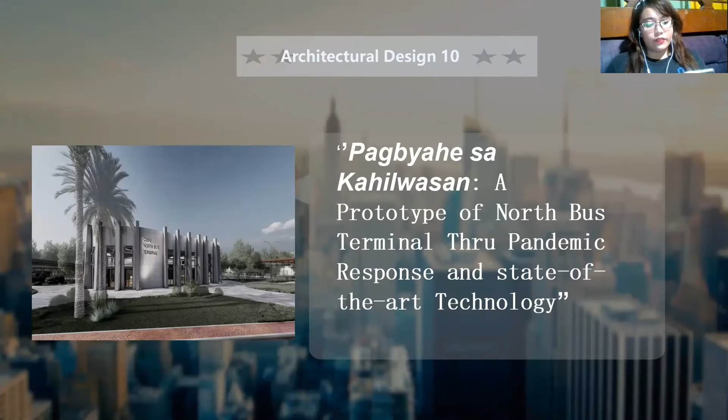Today, we are going to present our thesis titled Pagbyahe sa Kahilwasan, a prototype of North Bus Terminal through pandemic response and state-of-the-art technologies. For this presentation, we will be having 4 parts summarizing the concept and the working drawings: the introduction, followed by the design background, concept, and solutions.

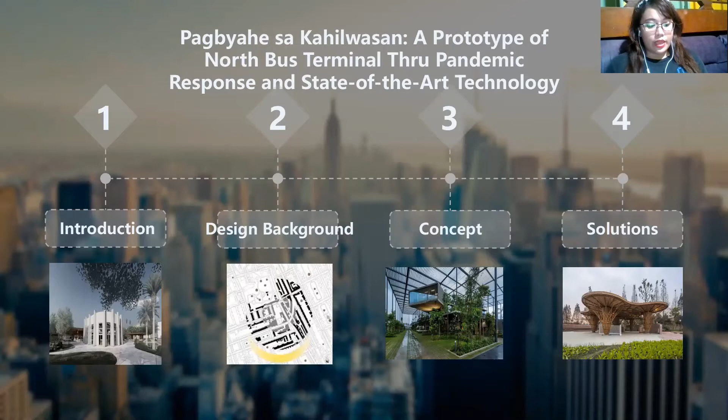So now we start with the introduction. This serves as the visual and guide on how we are able to incorporate ideas and solutions to make traveling and accessibility readily available, combining both traditional and new means. We also incorporate the use of biophilic architecture, which will be discussed in the succeeding slides.

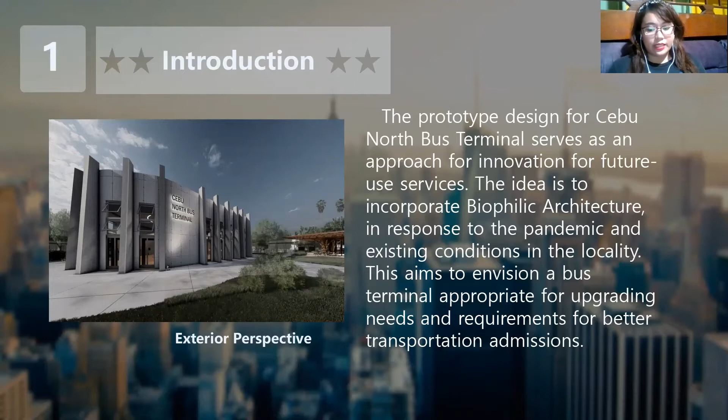This will serve as a visualization for innovative and advanced means of public transportation.

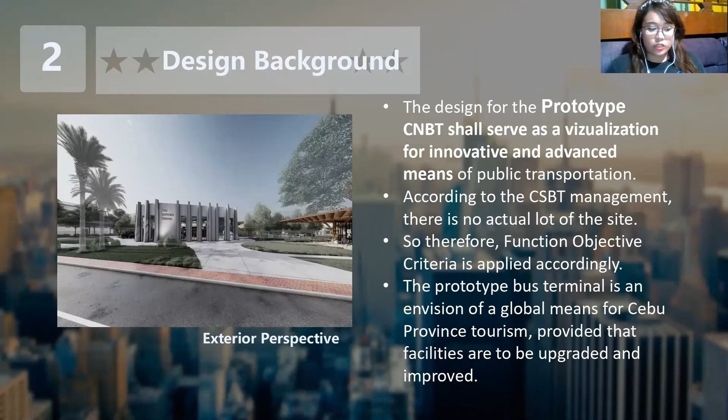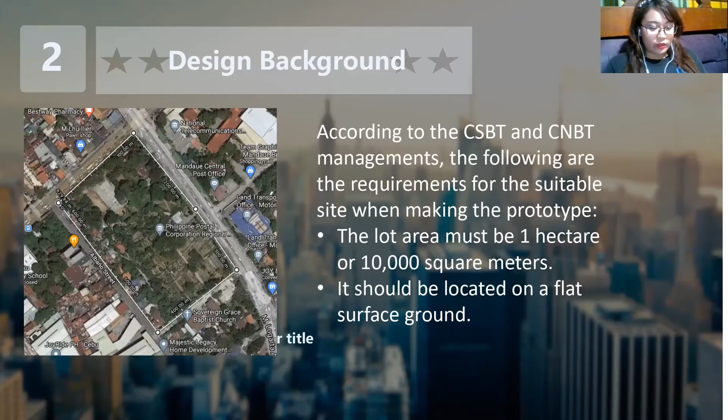So next, these are the requirements according to the South Bus and North Bus management for making the suitable site when making this prototype. The lot area must be 10,000 square meters or 1 hectare, and should be ideally located in the urban area of a city. Since South Bus is twice the size of CNBT, we made the North Bus only with the 1 hectare requirement. It should be locally accessible, preferably in the central part of Cebu.

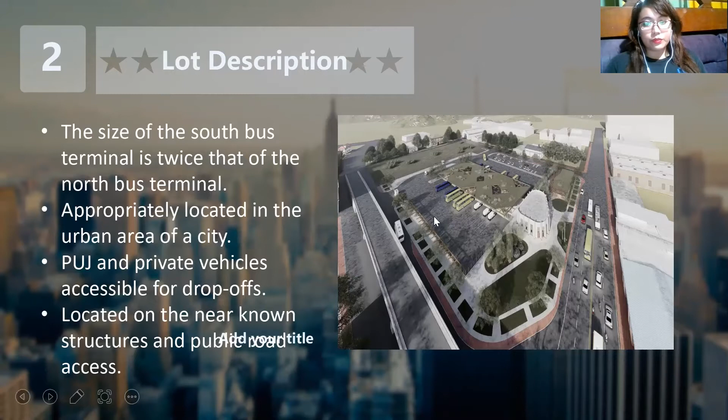So now this is the aerial view of the entire building footprint on one side and angle. Now we proceed with the lot description.

This is the map of our site, located in Subangdako, Mandaue, Cebu. We chose this site for a prototype design as it is located in the central part of Cebu, as mentioned a while ago. Now, this is the lot plan of our building footprint, approximately 23,400 square meters.

This site is surrounded by 4 adjacent roads, with Subangdako on the east side and busy road networks on the upper edge of Albano Street and the flyover.

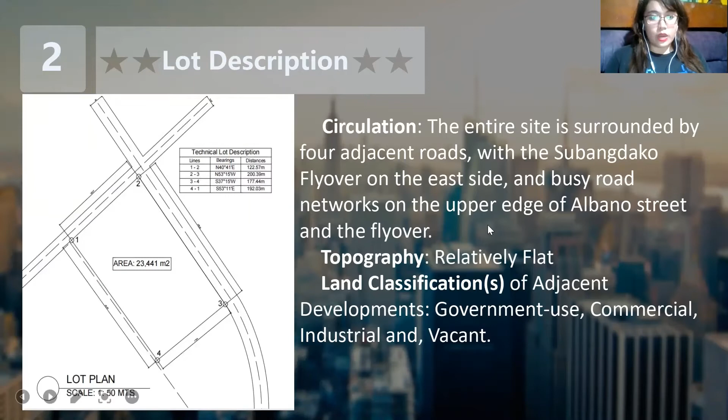I will now proceed with the design concept, which is biophilic architecture. To begin with, biophilic architecture uses both man-made and nature elements in the design, as both of these are combined and should complement each other.

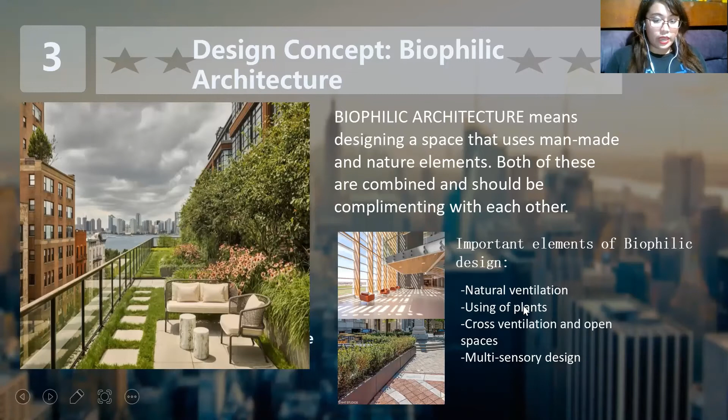This part you can see in the majority of our designs includes natural ventilation, using bamboo columns, roof garden, use of plants, cross ventilation system, passive cooling, and multi-sensory design. So I just added some information that are needed.

Now we have the design key points. First we have indoor air quality, for example using purifying plants, natural beauty for mental well-being. The design reflects the mood of the people, therefore it is also important.

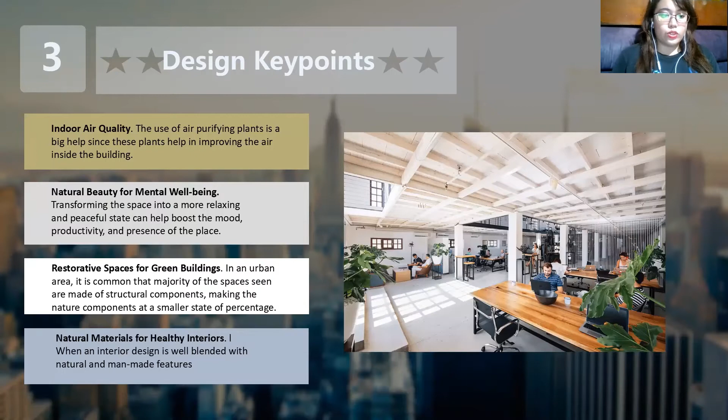Restorative spaces for green buildings, for example the roof garden that we use. Natural materials for healthy interiors should blend with the man-made features.

Then we have sound and scent for multi-sensory design. This design integrates the acoustics of the building; reducing outdoor noise also helps create a comfortable environment. And lastly, access to nature indoors - this is a major part of the biophilia aspect.

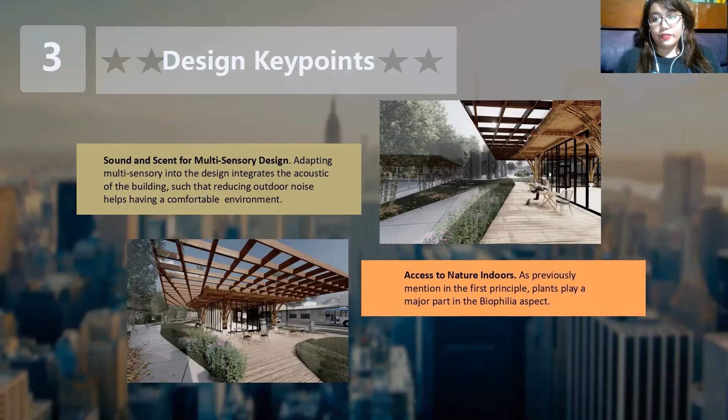Now we proceed with part 4, design solution. Again, this is the aerial view pasted here. Our design follows a theoretical approach, as mentioned a while ago, with nature and man-made elements complementing each other.

As stated, the site is located in Mandaue, one of the smallest urbanized cities in the Philippines, which should have more exposure to green design. We will elaborate on this in the defense.

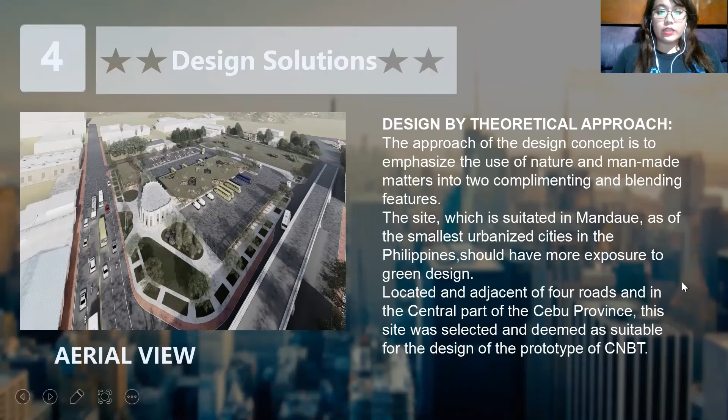Now we have the design solutions. The following content will be the site development, master plan, floor plans, building elevations, section, exterior perspective, and interior perspective.

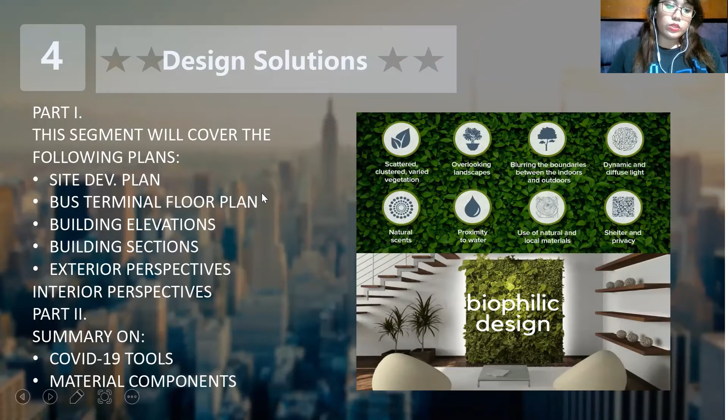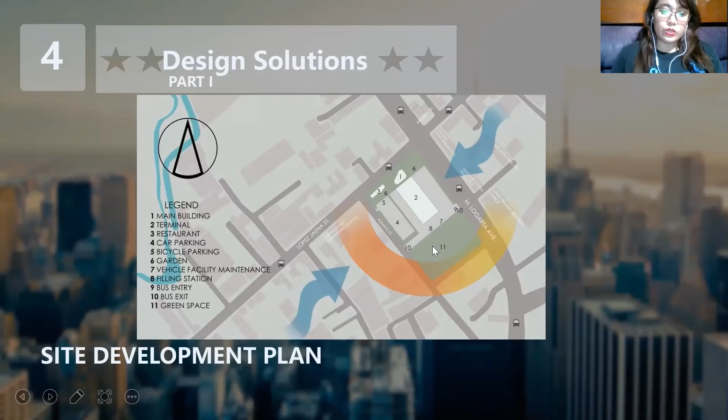So we have here the legends, the numbers indicating which part and each part is respectively located. And now we have the terminal building floor plan. As you can see, we have 4 terminals, namely terminal 1, 2, 3, and 4.

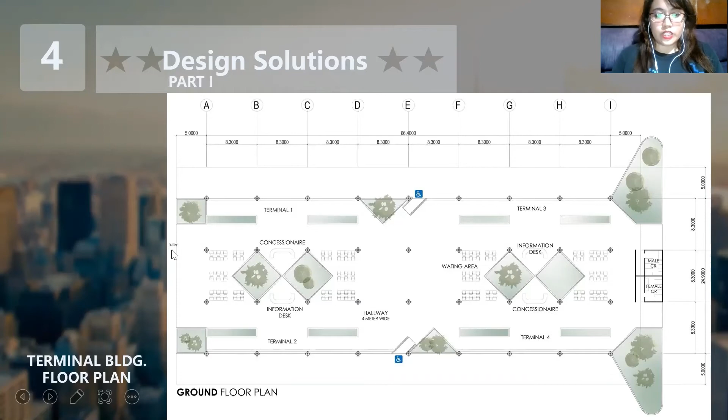The design of these two is like mirroring next to each other. And then we have the 2 PWD access entries. Here is the concessionaire, info desk, waiting areas, and this is the public restroom. And this is the entry, which is adjacent to this site, the main building.

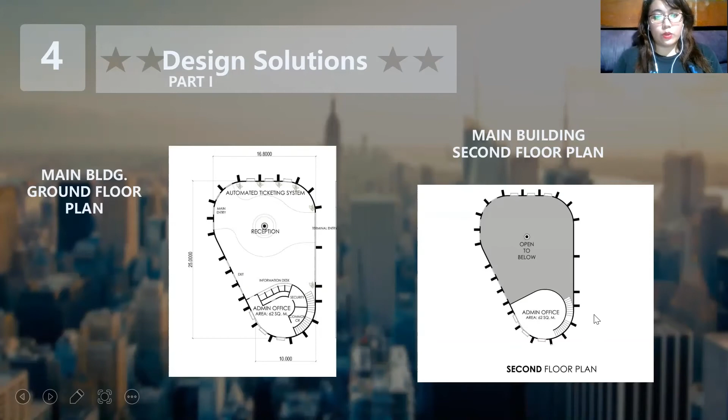And then we now proceed to the second floor plan. The admin office is really located on the second floor, and the rest of the space is open to below. And now we proceed to the main building front and rear elevation.

So this is the one. And now we proceed to both combined main and terminal building left and right elevations. So this is the main building, then followed by the terminal building.

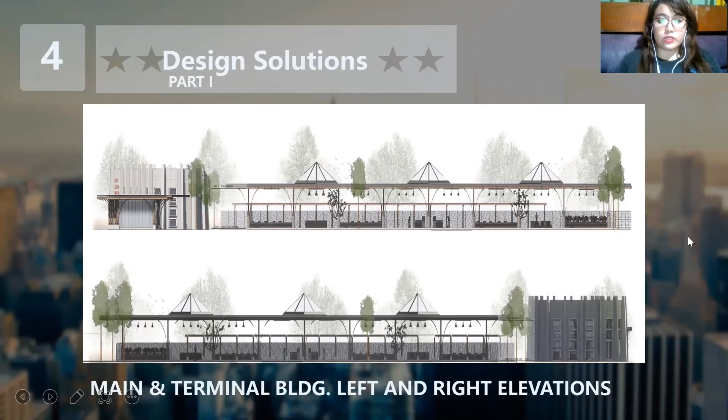This is actually an open space, so we don't have the section for that because it is an open space. And now we proceed to the section. We have one section for this building, the main building.

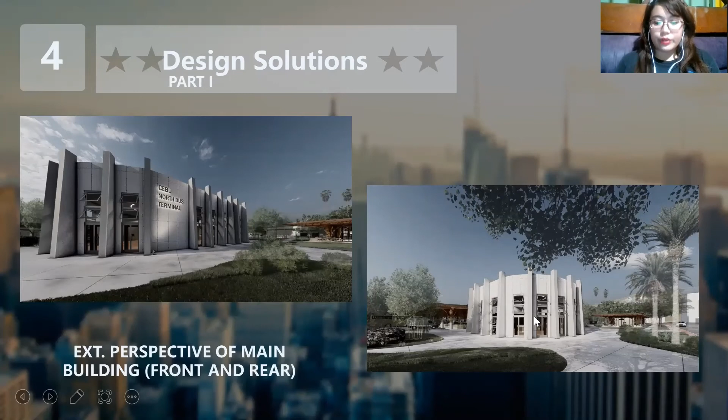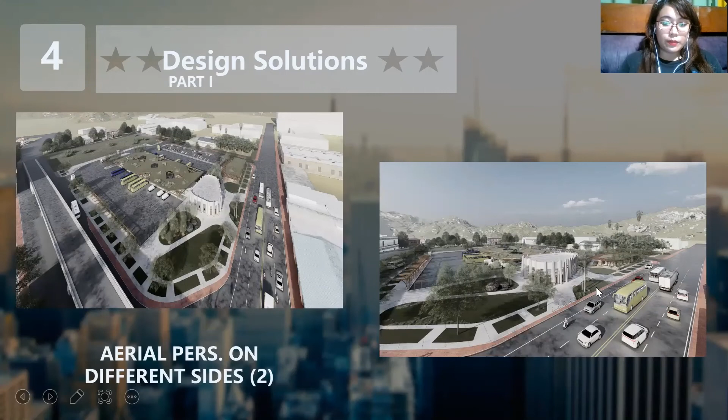We have the front and the rear, and now we have the overview aerial perspective. As repeatedly seen, excuse me, we have another on 2 sides here, the back building here and here. And this is the roof garden of the terminal building, this one.

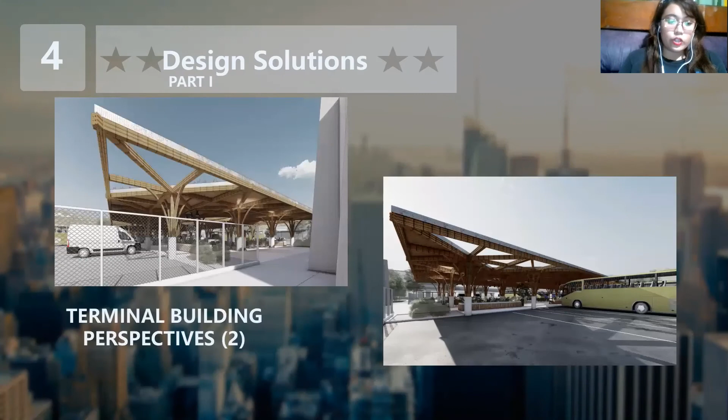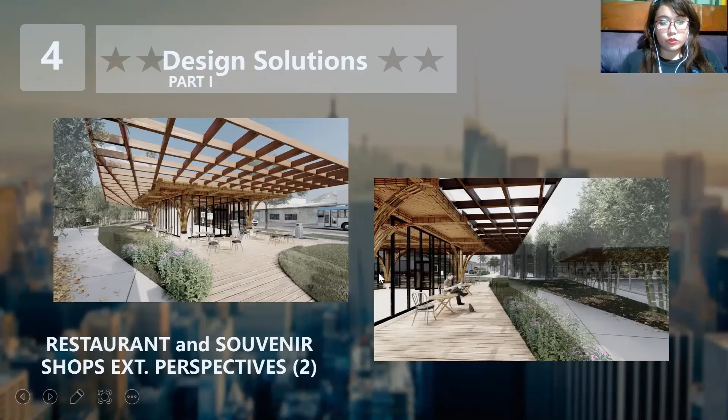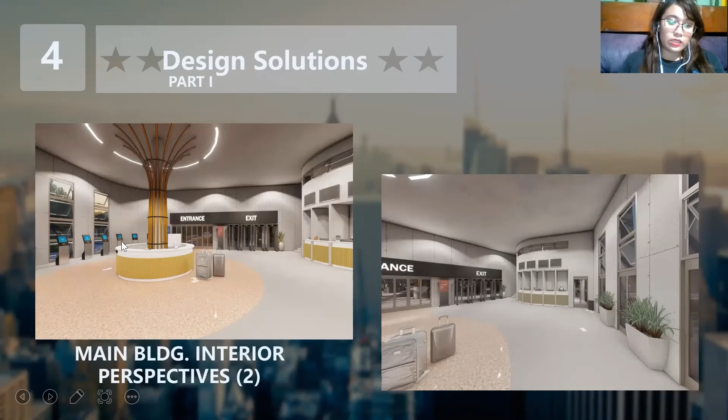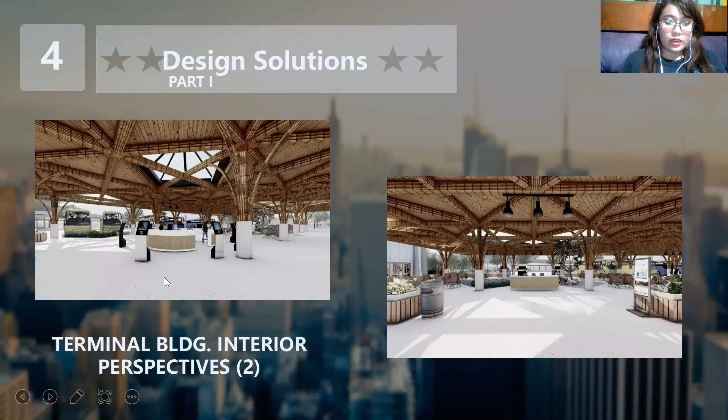This is the only building on the side that is closed. And then we have the terminal building interior perspective. You can see these are the info desk, and we have the e-ticketing for getting the tickets here and such.

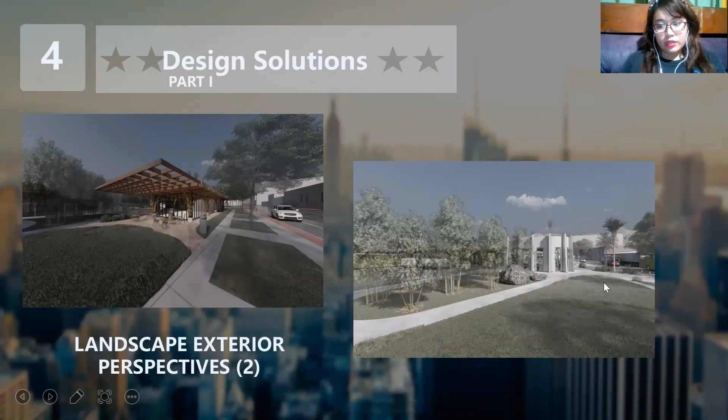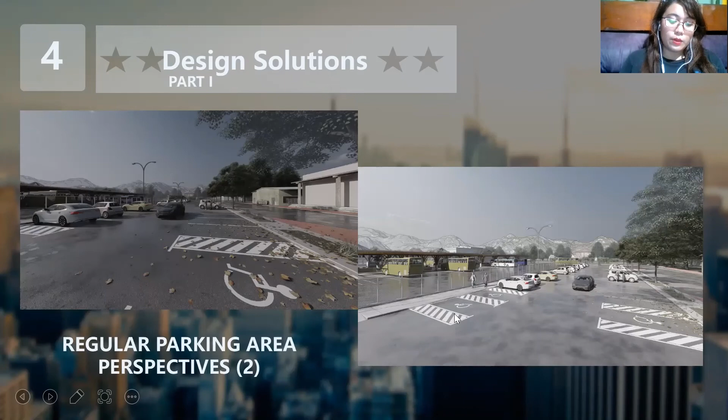Then we have the regular parking area perspective. As you can see, this is the PWD parking area. And now we reach part 4, the design solutions, mainly composing of the technology.

This includes the advancement of technology for more convenient and faster innovations in the developing society. Then, of course, the public transportation, and then the pandemic response.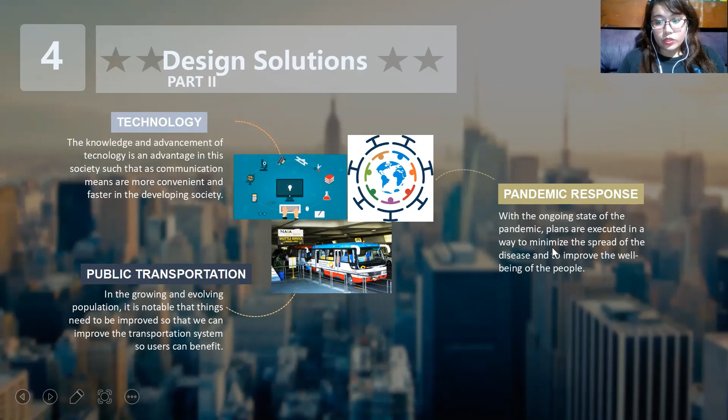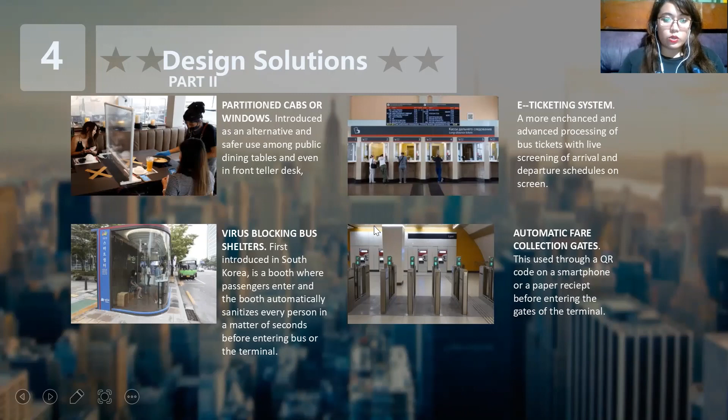Then the e-ticketing system and the automatic fare collection gates. Actually, this is also incorporated in the South Bus Terminal, which we also incorporated. Then, of course, we have the common contactless sanitizer dispenser and the tracker information, as this is also important, along with the safety signage and symbols.